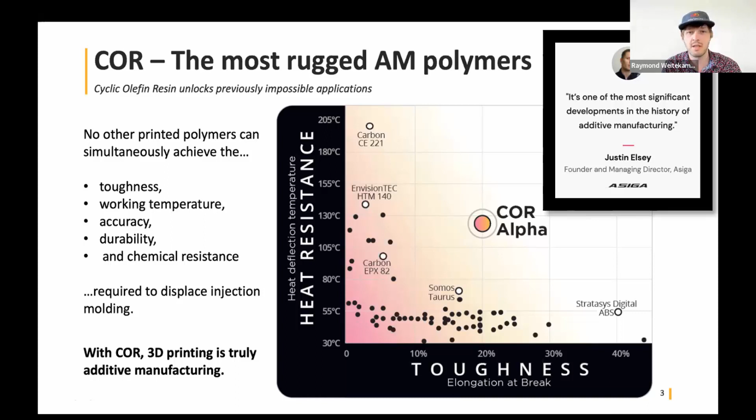But for today, the exciting thing we wanted to announce is that we now have this resin available for basically all of the hardware that's been out there for the last, I don't know, 5 years. Corey can probably correct me if I'm wrong, but the Pico2, the Max, the Max X, the Pro 4K...

The resin that's sort of ready to go, if you click through resin.polyspectra.com, is for the 385 nanometer models. But at this point, if you've got a 405 nanometer printer, we can help you—though probably as of today I need to email the team to set that up and clarify. So 405 is a recent development that's coming down the pike as well.

So those are really the TLDR, which is: this is ready for this whole family and universe of printers with Asiga, and now these printers that many folks on this call already have really have a number of new capabilities in terms of printing true engineering grade, production parts with very high performance properties.

So what I want to do, in terms of that outline I showed earlier, is first show a little bit of the technical data, because I think that's important to understand the applications. Then we'll highlight a few applications. Then I want to share and clarify some of the requirements for printing with this, and then we'll get into the questions at the end.

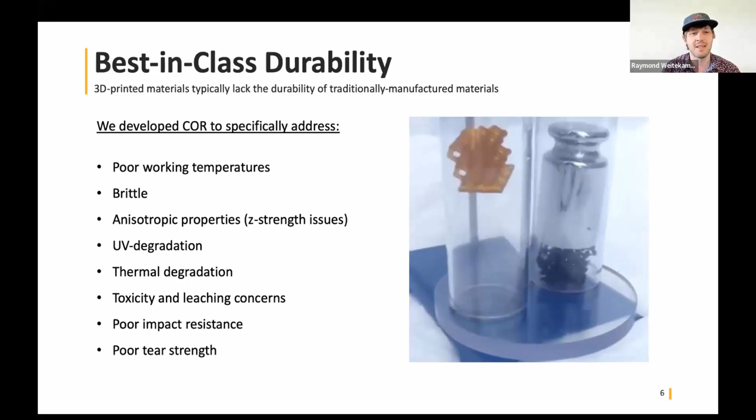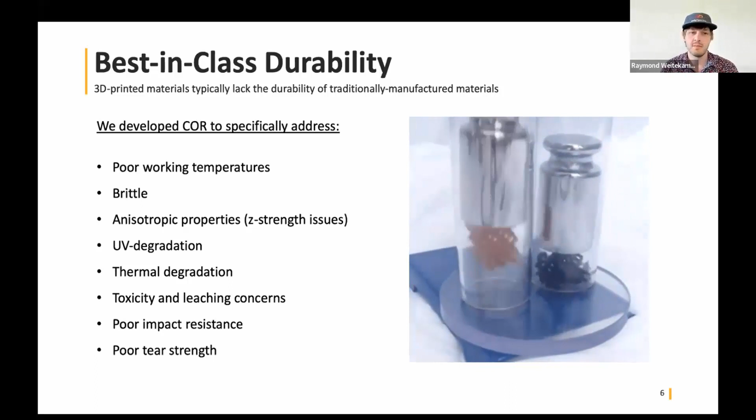Again, the specific white space we set out to solve is: a lot of challenges in 3D printed polymers in general, and especially photopolymers, is poor working temperature, brittleness. You have anisotropic properties where the Z strength isn't the same, all kinds of degradation, leaching, cytotoxicity—all of these things. That's really what we're out to solve.

To highlight a little more quantitatively where we are—first on the mechanical side, and then I'll go to thermal—this is a very rigid polymer. We've got, I guess I'll do some stuff on camera and some with slides, but this was a fun part we did called the space wrench. This is very rigid, but it has the unique ability to still fail in a ductile manner.

So there's a plastic deformation that happens—instead of snapping at the UTS, it actually yields. I don't know if you can see my mouse.

There's a little notch there that's an artifact from the way we do the test with an extensometer, so you can ignore that.

The UTS is about 65 to 70 megapascals, and then it'll yield and turn over. We've set the spec for COR Alpha to be at least 20% elongation at break. Sometimes we get higher than that, and every now and then you'll get a dog bone at 100. At that point, once you're in that plastic deformation, it's kind of a statistics game of when that crack is going to get big enough to pop the part.

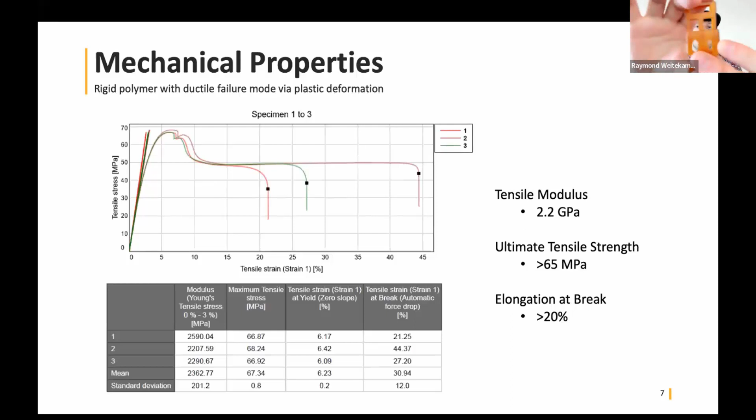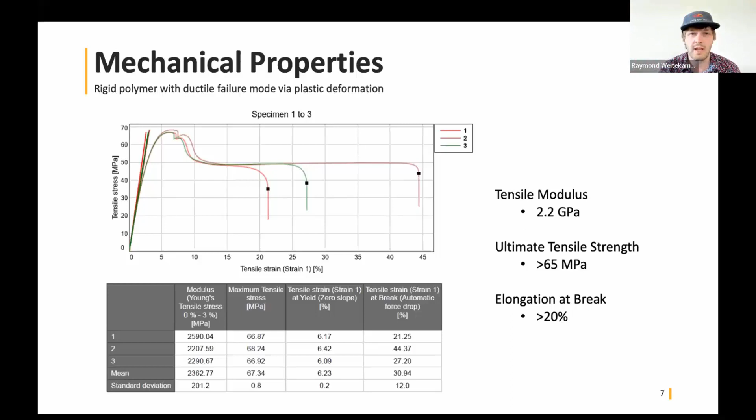But this is really solid mechanical properties where there's very good stress retention, but there's still flexibility. Maybe the snap fit buckle would be a good example of that, where it can deform enough to click into place, but it can also lock. That would be a more visceral way of explaining what we're looking at on this curve.

On the thermal properties, unfortunately I'm at home and not set up to safely demo high temperature here in my home office, but we have incredibly high glass transition temperature. I'd probably say we're the highest TG of any photopolymer out there. There are some folks who, through different filling strategies, have heat deflection temperature higher than COR Alpha, but for the resin network of our material, I can't off the top of my head think of another system out there that's higher, and if there is, it's definitely not tough.

Depending on how you want to think about working temperature, we have some customers that use our materials in applications up to 200 C. Obviously that's not a load-bearing condition. That would be something like a mold insert for an injection molding process where it's getting hot and cooling relatively quickly, or like a fixture on a high temp process line, like an end effector or something.

If you're under a load, you probably want to stay under 130, but again, that's still hot enough to be under the hood, hot enough to be in an undisclosed automotive application that Corey and I will share later.

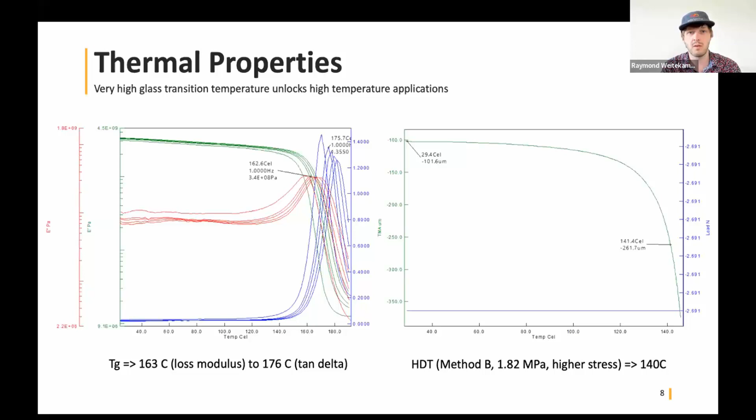So yeah, I highlighted some of these. In addition to that, it's grade 0 cytotox every single time we've ever tested it, and we do that quite regularly, and it has very, very low dielectric loss. So this is a very good dielectric. I don't have the breakdown voltage off the top of my head, but that's another application we use this for. It's a very good insulating material for electronics applications as well.

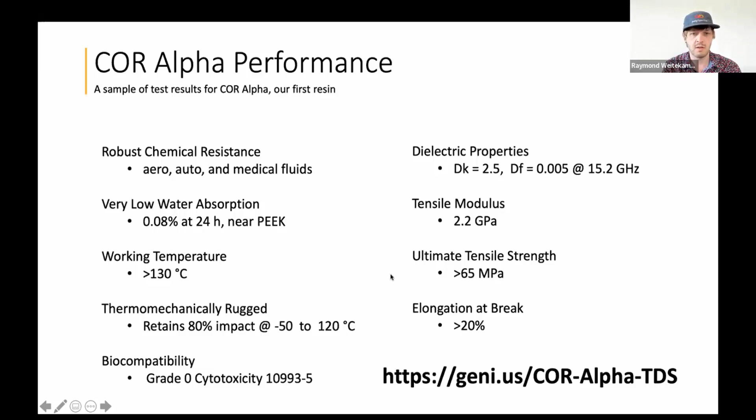So with that context, and again apologies to folks where it's like, whoa, what's an HDT, what's a TG, why are we talking about that, I think it's important foundation for showing the technical differentiation of the product, and now I'd like to jump into some applications.

We're very active in auto and aero and other kinds of industrial vehicles and equipment, and in defense things.

Robotics and automation is an important one. We have a number of things coming down the pike in medical and dental that I'm personally very excited about, but don't have quite ready to share today. I will show some cool stuff towards applications relevant to consumer products, and we have some pieces on electronics. My hope is that folks watching, both live and later on YouTube, will look at some of these and start to see, oh, there's that one component we're thinking about for our project. So I don't want this to be exhaustive, we could spend 90 minutes on connectors alone.

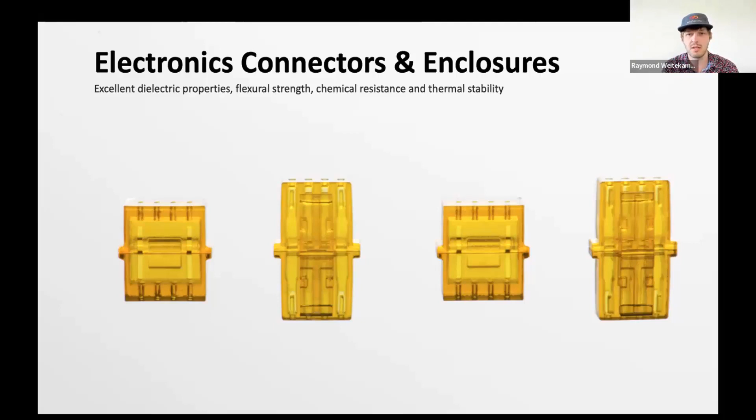The first one I want to highlight is in electronics, not the conductive part, but the insulating material. Connectors and enclosures, different components, fixtures, brackets, applications in 5G, clean rooms, end effectors. There's a whole bunch of things where you need a good dielectric that won't crack on you, that's chemically resistant and can withstand temperature, especially on process lines or under-the-hood applications. As cars become more connected, with miles of cable and around 20 different computers inside every car nowadays, and everything moves toward a highly connected Internet of Things, most people don't know that behind the scenes are lots of little connectors fitting things together. This is a really cool and challenging application area, and having high resolution and good material properties is key.

We've shared this one in the past, but it's a fun highlight. In the end, we did not go all the way through FDA with COR Alpha for RespiraWorks, but it was a really fun story at a very scary time, very early in the pandemic, where we helped this not-for-profit group get all the way through functional prototyping with this valve in the bottom, not the Venturi valve, but this flow valve. They did a million or a couple million cycles on this part toward their regulatory approval. In the end, this ended up getting manufactured and distributed largely in India with a CM capable of turning on millions of these things all at once.

But it was a really cool opportunity to showcase the power and agility of these materials. This was something where they had tons of FDM printers and friends at different service bureaus with all kinds of processes, but they weren't able to actually use those prototypes because they kept cracking, since the accuracy was off. So this is a really fun one.

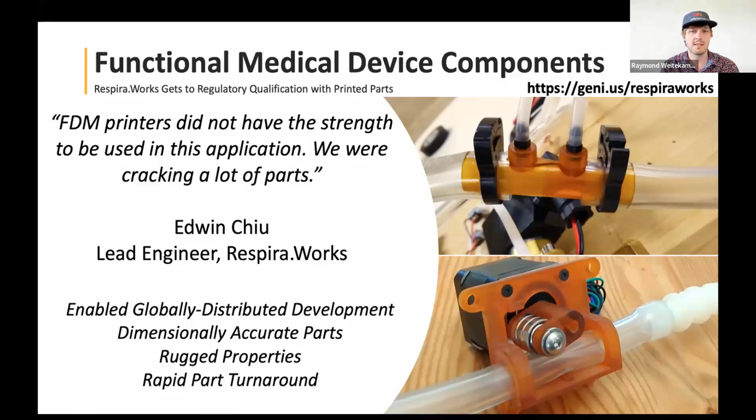What I'd love people to see in this, and maybe start to think about, is what other kinds of connectors or fluidics, for example for a medical device application or biotech assay application, where you need that chemical stability, a bioinert material that's grade zero. That's where I want people's heads to be at for this slide.

I did not found the company with the mission to be the best in rapid tooling. My founding idea was, hey, if this thing worked, you'd never need a mold again — you just print what you want, in the shape you want, exactly as many as you want, and you're good to go. But one of the really fun and humbling things we've learned a lot about is that rapid tooling is a real market and a really important application. There are tons of things where either you don't want to requalify the material, or you ultimately need a really high volume run and want to iterate along the way.

Most of the molding stuff we've done I can't show, but this is a demo part in collaboration on a project we're working on with our collaborators at Oak Ridge National Lab, a DOE National Lab facility that has some of the world's experts in 3D printed tooling and rapid tooling. There's a bunch of really cool research projects we have going on with them.

So on this one, I apologize for not having more data. Most of it's locked up under NDA in terms of what materials hit what number of cycles. But I'd say we're between 2 and 10 times longer lasting than what most people use for rapid tooling in the context of a mold insert for injection molding. And we have some stuff coming down the pike with collaborations where we're working on making really high performance mold inserts that could start to rival what you'd call soft tooling, like CNC aluminum tooling. It's relevant not only to injection molding, but reactive injection molding, and other molding of thermosets, polyurethanes, as well as blow molding.

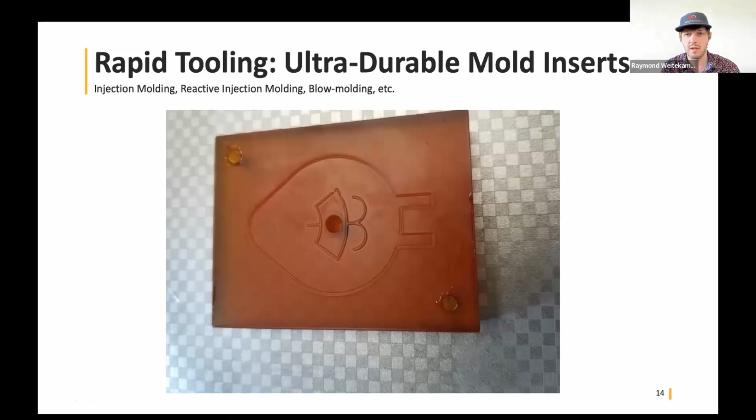Okay, on the more direct printing consumer products side, this one I'm really excited about. We announced this very recently, a partnership with a specialty powder coating company called Keyland. They have a product called UV Max, and I have the green one here live with me, but we showed a number of different colors on this press release together.

What's really fun about this is you can print a million of these and then say, okay, I want 100 that are this color, 20 that are whatever my brand blue is. The end solution here, I wish I could let everybody on YouTube and Zoom touch this, but it really has that kind of feel of a consumer grade part.

Some of the folks watching will know that powder coating is a very common process for finishing consumer products. So it really gives it that nice feel, and it lets you take the same set of printed parts and turn them any color that you want. Keyland has the expertise to actually do color matching, so whatever your brand color is, just tell them the color position and they can match that.

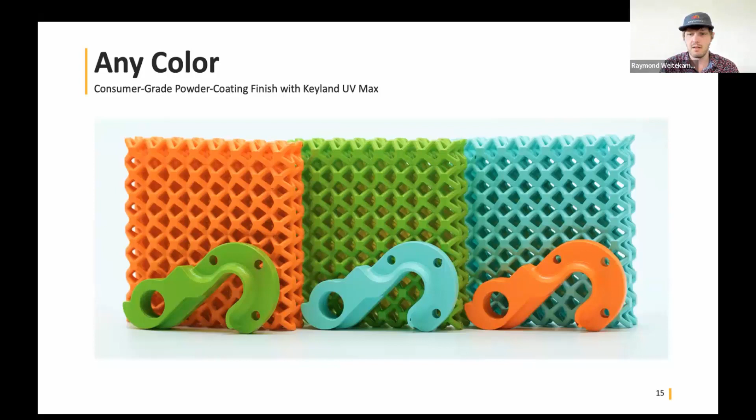And then this next one that I want to share is still slightly secret, under wraps, but it's another coatings partnership that we're going to announce very soon. This is a different type of coating where we now have one of the world's most high performance rugged ceramic coatings on top of one of the world's most rugged high performance photopolymers. We're really excited about this - I couldn't help but show this picture, and this is something we're going to jointly announce soon.

And the geometry we're showing off here is an example of something that's become really fun and important for us, which is lightweighting for vehicles - improving the energy efficiency of vehicles through lightweighting, whether that's a car, airplane, or truck. This strategy is called Topology Optimization, and this particular geometry is a demo part from nTopology, our friends over there.

With this combination - I wish I could hand this to every single person here - of this really high temperature, abrasion resistant, chemically resistant coating, not only do you get all these different colors, but now you can really start to think about true metal replacement with this combination of polymer and different coatings. I think metal replacement will also be a theme that Corey and I are working closely on, and we'll share in a slide or two.

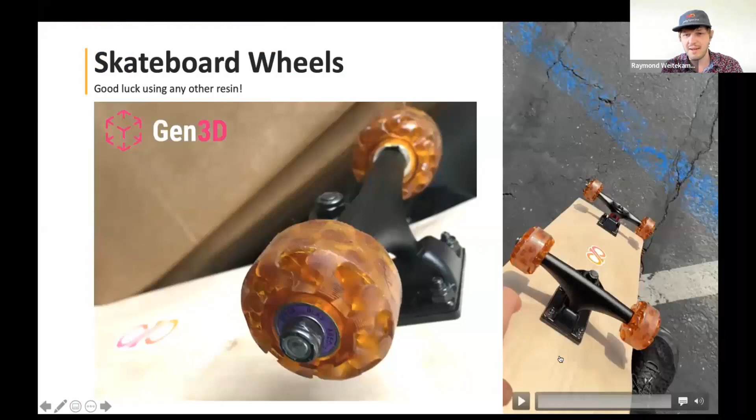So then one other really fun one I want to show, massive market, $2 billion global skateboarding market, really really important. This was a fun collaboration we had with a company called Gen3D. They designed these, and I reached out and said, hey, what are you going to make this out of? And they said, oh, we hadn't really thought that far ahead, we just wanted to make a cool render on the computer.

So let's see if this video will play. Can you hear the audio, Corey? Awesome. Yeah, so the first ever 3D printed skateboard wheel. I don't know, but definitely the strongest.

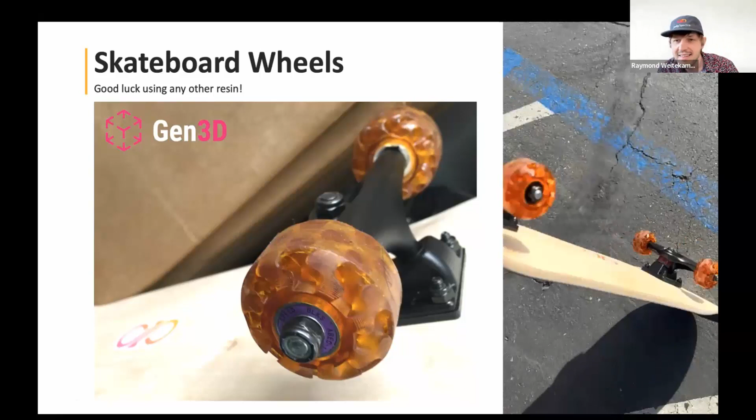So I'll stop it a little short, but I'm not sure it's the first 3D printed skateboard wheel. It might be, but I am definitely sure that we can call it the first durable 3D printed skateboard wheel. Nice, there you go. Just add one modifier and that will make you the first. Yeah, I think that's the classic rule in marketing.

So yeah, this is a really fun one, and we have some videos up and a few more things coming down the pike with this.

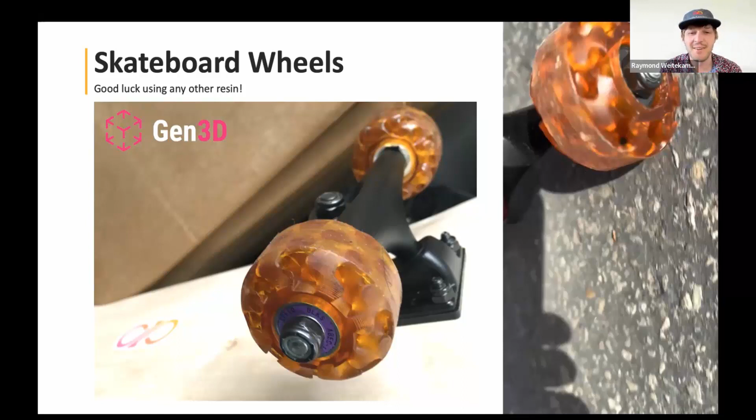I can't imagine there's a ton of folks on the call from skateboarding companies, but this is really an application where we've had a few folks visit the office who have been in 3D printing for 35 years, and their heads kind of exploded when they were like, what? You can do that with a photopolymer? So this has been a really fun one, and one we're excited to share a little bit more about.

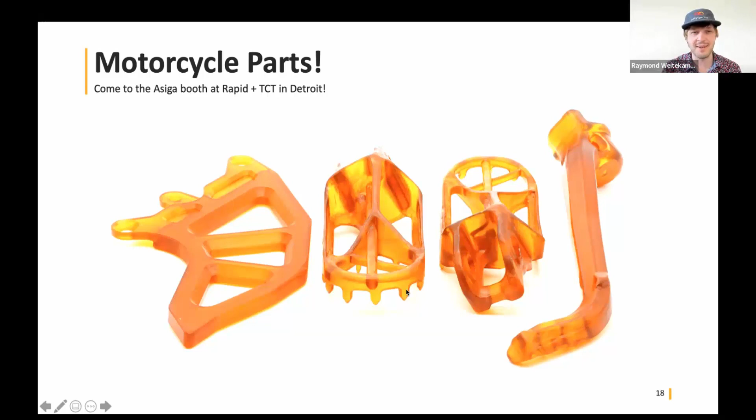Yeah, that's really going to be great. I will say from my side that this has been a really fun project for our team to work on, but we were very honored when Corey said, we're going to have lots of different components from the different materials partners that we have, but I'm going to save the really, really hard ones for you. Well, it's true, as a 3D printer manufacturer that's open, we're friendly to all of our partners, but these parts here are the parts that take the most abuse. And I know we like being abused because polySpectra has that unlocking next generation material. These are the true test. So we'll see if we pass, but we're having a lot of fun along the way. Yeah, awesome, okay, here we go.

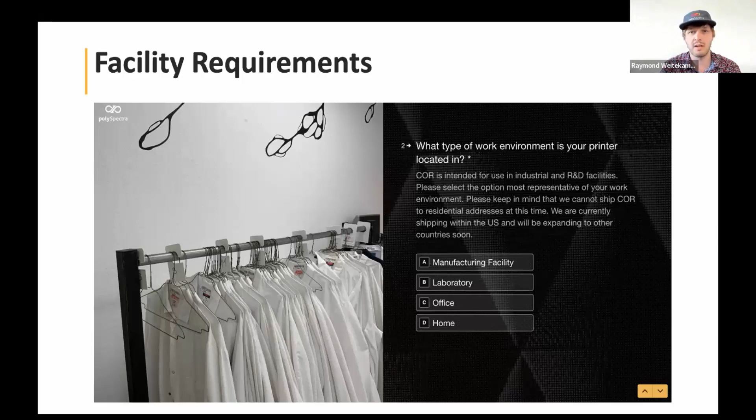So we do need ventilation, and I've shown just one picture here of how we have our Pro 4Ks set up in a recirculating hood. This is not like a full-on walk-in chemistry fume hood that's pumped into the HVAC system of the building, it's just a recirculating system. Again, our team, and I'll give our support at polySpectra email address later on this, can help with various different ways of setting this up.

For the smaller printers, you can do different kinds of snorkel systems or fume extractors. If you're in a lab, on our R&D lab we have lots of Picos and Maxes in proper chemistry hoods. But basically it's very important to have the ability to ventilate the printer and then the station where you're cleaning the parts.

Again, that's something where we can help with providing some recommendations for enclosures that fit specific printers. We do have form factors of this where it's benchtop, but with some VOC control built in. So it doesn't need to be like a complete remodel of your facility, but we do need to set up the operators to be running this material safely.

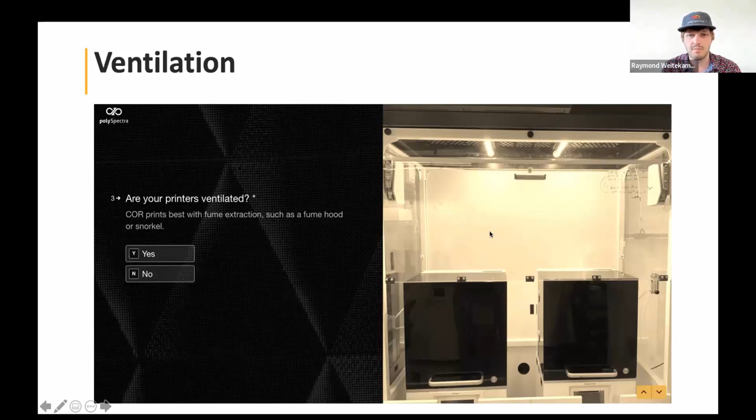Another thing you'll see on the website at resin.polyspectra.com is that because the working temperature of this material is so high—the Tg is between 165 and 175 C depending on how we measure it—the part goes through a thermal post-cure.

One thing I'm very excited to announce today is a way we're working to make this simpler and lower the burden in terms of requirements. Our gold standard post-process involves a vacuum oven, an inert oven where we get the part to 160 C under vacuum for about 90 minutes, and then it's fully baked at that final working temperature.

What we're excited to share today isn't quite ready for purchase, but will be available very soon. This has been a sticking point—a number of folks have said, well, I've got an oven but not a vacuum oven. So we have a new product called COR Cure, a workaround that lets customers use a normal oven, no vacuum or nitrogen needed. The part is submerged in a heating oil fluid that helps it shoot the gauntlet and reach its final Tg with protection from oxygen and air. That's very exciting.

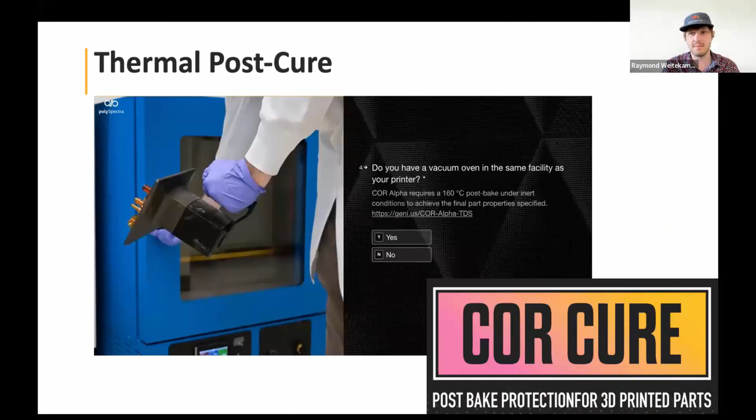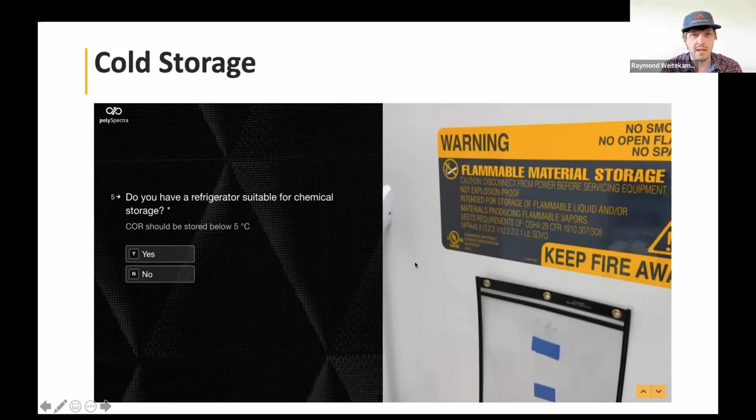We want to be as clear as possible and make sure you're set up with all these things. We're happy to advise on the safest way to set things up and recommend equipment. I'll thank Justin from Asiga for pushing me to give people the full package—here's everything you need to bring this forward. We're working hard on continuing to clarify that, and I'm happy to answer specifics in the Q&A.

On our side, we're building documentation and checklists so you don't place an order until you've got everything in place. We've also got an INI file that will load onto, I don't know, the last five years' worth of Asiga printers for customers. It's not easily shown in PowerPoint form, but we've validated print settings for all the different printers, both ones actively for sale and ones you might have purchased in recent years.

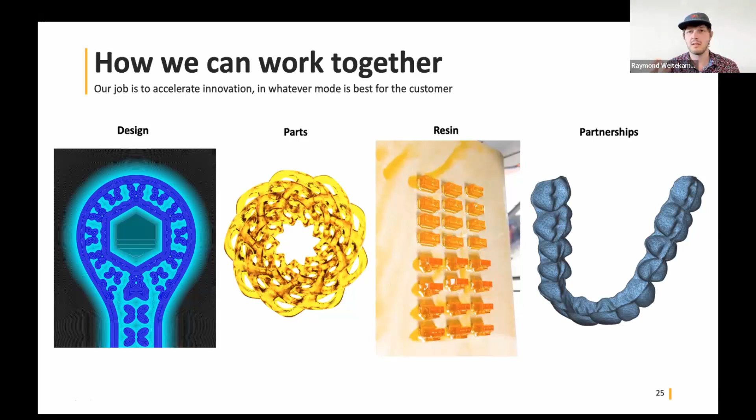I want to wrap up with a quick summary. Today's main announcement was on the resin side—we've got the resin ready for Asiga customers. But I want to quickly run through the different modes of engagement we offer depending on where people are in terms of having additive manufacturing capabilities in their own organization.

For some folks, we can start all the way at the design side. We're not the best in the world at this, but there's work on implicit design, topology optimization, design for DLP, and design for COR Alpha, which is closely connected to design for DLP. We have a good understanding of the features we're good at, minimum overhangs, minimum through-holes, etc., and we can help with that if necessary—we have a lot of experience doing that.

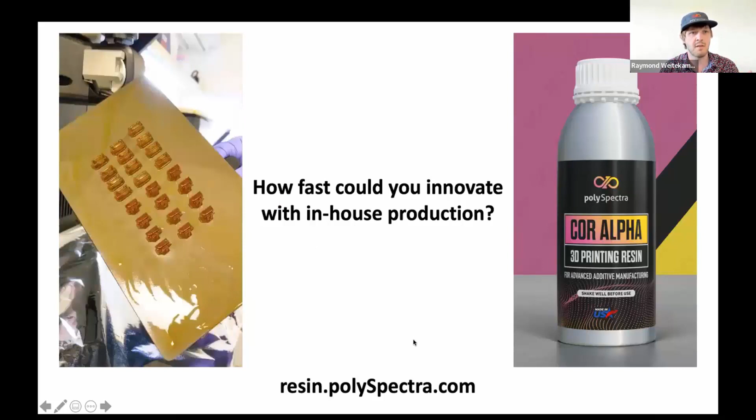Showing people what we can do and getting parts into people's hands quickly for application development. The main announcement today was on the resin, and this is a fun video of doing a bunch of little tiny electrical connectors on the Pro 4K, just to show if you really did have production AM in-house, how fast could you innovate? How fast could you iterate? What's possible in that world with your facility?

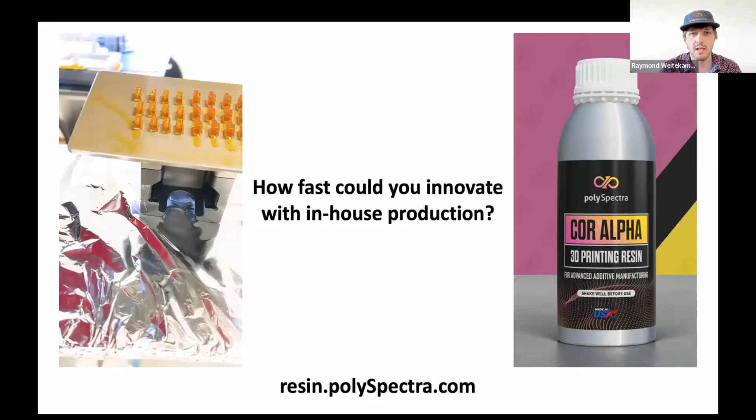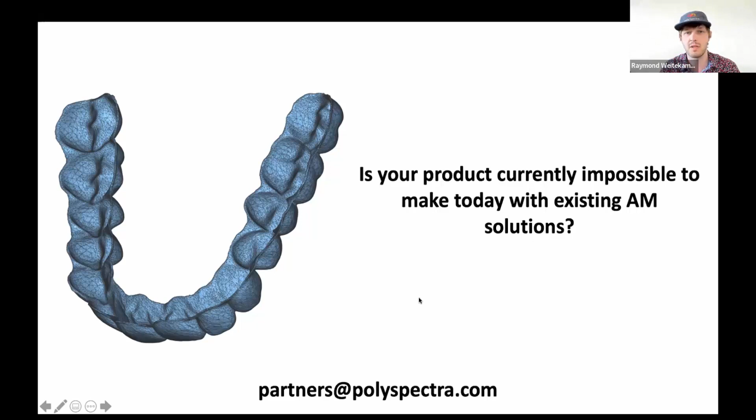There are a number of applications where people say, hey, this is cool, but could you do black? Or this is cool, but could you do 200% elongation at break instead of only 100? So if you're a manufacturing company, durable goods company, or OEM with an impossible problem, a very specific product, and you know what the problem is and you've tried every material and it doesn't work, we can help you. partners@polyspectra.com is the team that leads those joint development agreements, and that's something we do quite regularly.

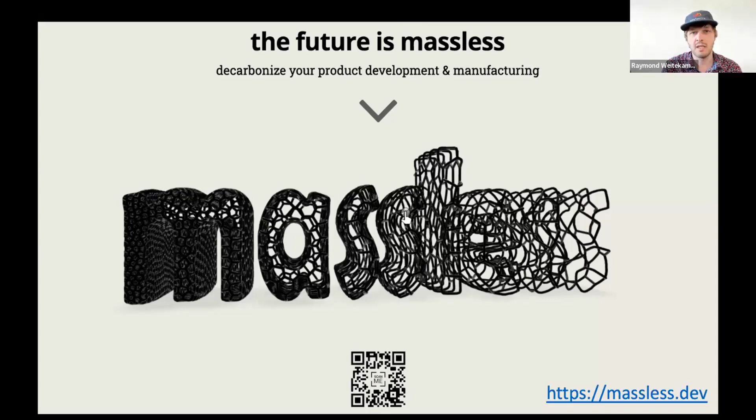One of the first tools we put out there is really fun, and I'm biased because I helped build it, but it's part of this puzzle: if you're just going to print something to look at it, you know how it goes—you design something in CAD, it's on the screen, and then you print it and think, oh, that's kind of small, or it looked cool as a mesh but once printed it was too dense, or I thought it would be more open. If you're just going to look at it as a prototype, do you even need to print something?

The AR tool, in its current form factor, lets you drop in your STL and it'll instantly show it—you need an AR compatible device, a tablet or phone. If you do it on your desktop with your STL there, it'll give you a QR code to hand off to your phone, and you just get the AR preview right there, see it on your desk, and try it out. It's a really fun tool.

Obviously this on its own isn't going to reduce global energy usage by 25%, but it's a fun, fast way to try things. One fun feature right now is you can change the color to anything you want, so you could use it as a way of previewing color matching. The default color is meant to look like COR Alpha, but you can tune the color once you drop in your STL.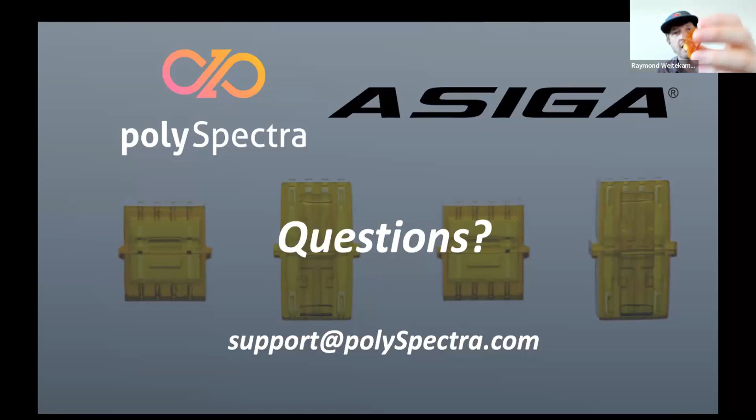We have a lot of folks doing impellers. We didn't actually show a slide of this, but I'm happy to share publicly that it's a cool capability we have. It adds a little bit of lead time and cost, but for something like a bioreactor, this could be really amazing, because you're not going to be cooking microbes higher than our working temperature—it's grade 0 cytotox. But if you're doing a jet turbine blade, you probably still need some of the surface thermal and tribological properties of a metal.

And we actually do have the ability to electroplate COR Alpha. Let me see if I can show off one I have with a nickel finish that we did with Sean at Repliform. This adds some complexity—it's a secondary process, and depending on how thick it is, the quantitative stiffness it adds can be very different. But you can now get the surface tribological properties, the surface thermal properties, the surface electrical properties of a metal at the price point and geometric freedom of a polymer, and the weight of a polymer too.

So for something like an impeller that would traditionally be CNC'd aluminum or steel, you could actually start thinking about doing COR Alpha. Just to super clarify, this bar is COR Alpha on the inside with a very, very thin layer of nickel electroplated on top of it.

And then obviously skateboard wheels, incredibly important, large market, and gyroid based designs is an important application area for us. And then, as I mentioned earlier, lightweighting—brackets, enclosures, fixtures—so many things are made out of aluminum just because it's cheap and available and that's what people know how to use.

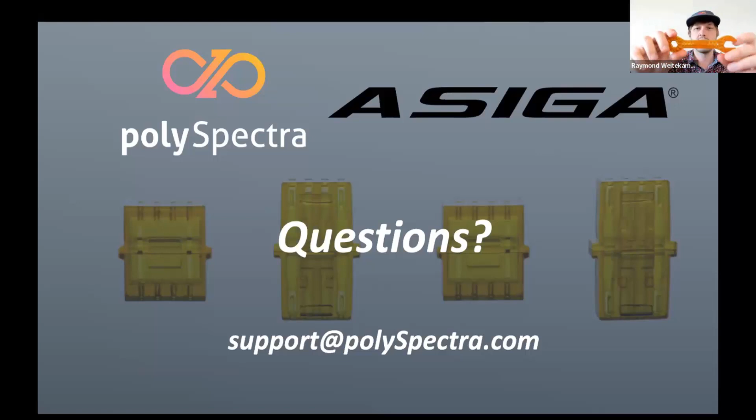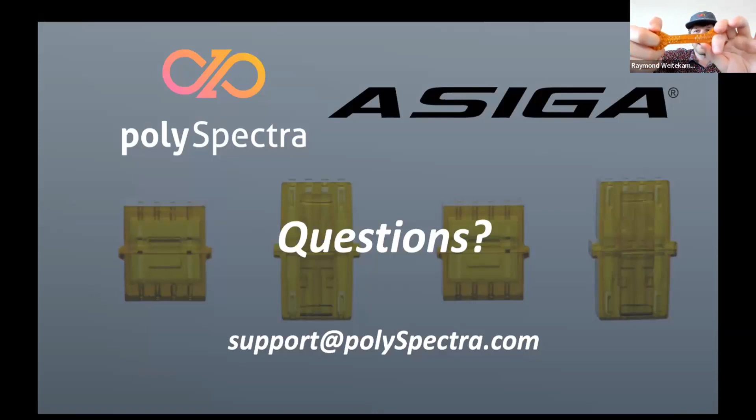We did a whole webinar where for the space wrench, we actually predicted exactly where it would fail when it broke. We ran this finite element model to figure out the ultimate tensile strength of the material and the stiffness, and basically figured out at what load this thing will eventually break. So my short answer is nTopology is the one we have the most experience with directly, but obviously if we give you all those mechanical parameters, you could do it in ANSYS or something else.

Awesome. We had another question about the stability of the resin - what happens if it's stored at room temperature?

On the time scale, this is something we're working on improving over time. Right now the guidance - and we can send documentation to folks in a follow-up - is basically, if our team is actively using the resin and running prints, we'll leave it on the bench. If you want to sit on the resin for more than a few days, on the time scale of weeks, then it's best to put it in the fridge to get the exact same printability and print profile. So if you're going to sit on it for a week, put it in the fridge, pull it out, let it warm up, and then put it in the printer.

We print at about 30 C set point on most of the Asiga printers, and that's built into the INI file we've prepared. And if for whatever reason you can't get to it and you're going to sit on the bottle of COR Alpha for months before you can print, then right now the recommendation would be to freeze it, and the shelf life is quite long. There's no issues with freezing your resin as long as you thaw it all the way - then you're fine.